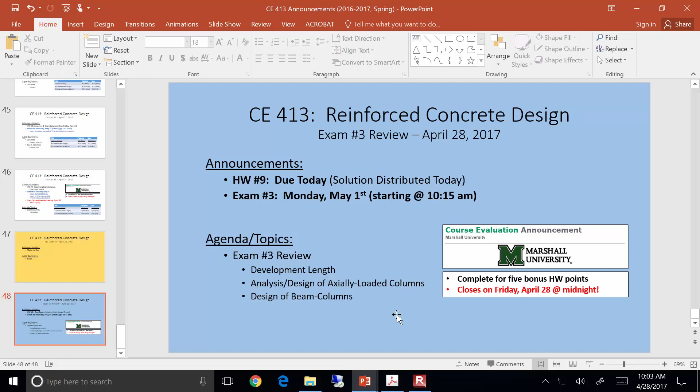I don't really think there's a whole lot to say about the solution. Problem 1 was literally just phi Pn, just calculated, and it ended up being about 570 some kips.

Problem 2, you had a design of a circular column. Go through and do the math. Now keep in mind this is a circle, not a square, so because of that, you could have 9 bars or what have you. It doesn't have to be even. You can, but it doesn't have to be, because they're just going to evenly space it around the spiral. So the solution that I derived was really the one that was in the book, which was using 9 number 10s. So there's that.

For problem 3, really the long and short of it is this: you should have gotten a KN of 0.579 and RN of 0.193. Go through and do the interpolation. You should get a rho of 0.027.

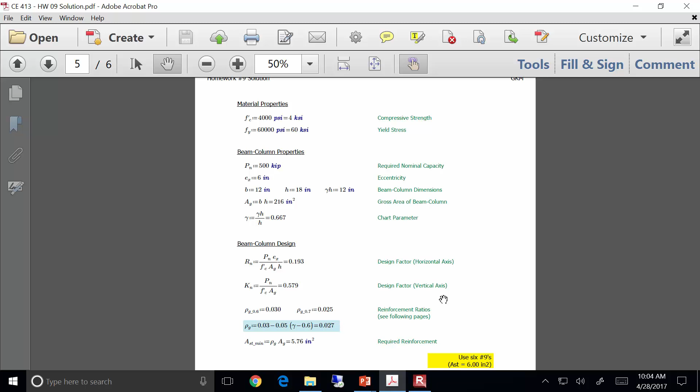And you should ultimately use 6 number 9s. Here's the alignment chart, or the interaction diagrams, and I drew the lines showing how I'm getting those particular values, so that way you can kind of see that. Sound good?

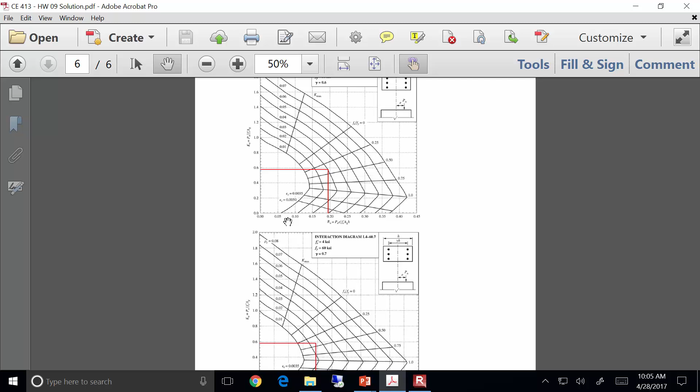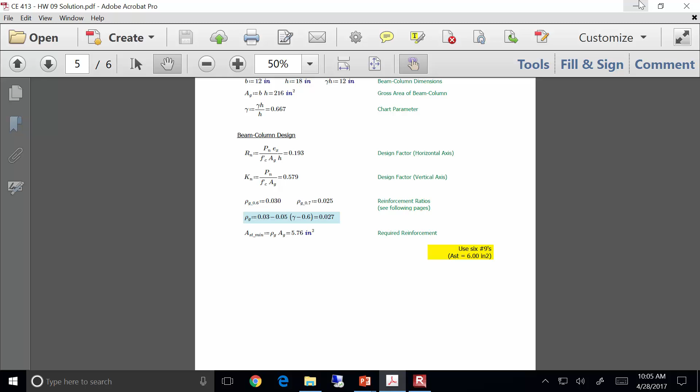When it was all said and done, the rho was 0.027. So ultimately, I ended up needing 6 number 9s. So it was a pretty straightforward assignment. Sound good? Yep. All right, let's talk about the exam.

The exam is going to be on columns, beam columns, and development length. That's going to be on this exam.

All right. Let's talk about the scheduling. So and the housekeeping, closed book and closed notes. You've got a oh, yep. That's not a mistake. I could have just said, you know what? No. No, I'm good.

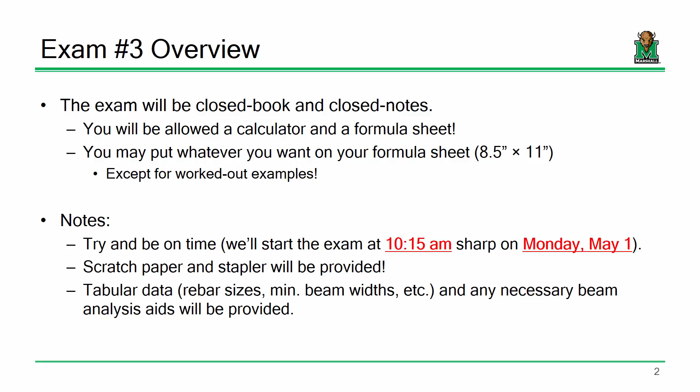It would probably not be the worst idea in the world to write down some fundamental beam analysis or any of those fundamental formulas, but anything esoteric you'll be provided. That's not a big deal.

Topics: development length. Make sure you can identify the parameters that may affect it—bar coating, bar size, bar location.

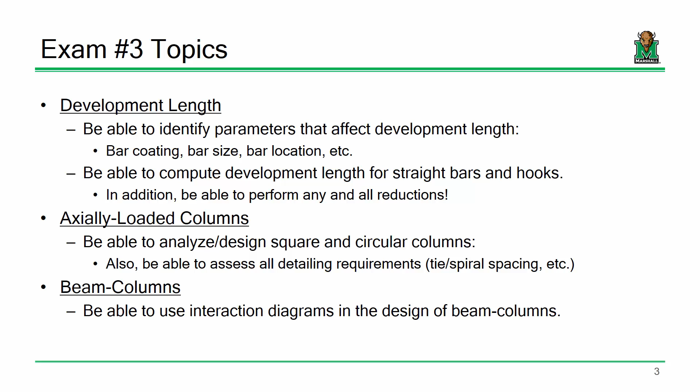Be able to compute development length for straight bars and for hooks, and be able to perform any reductions that go along with that. Columns: make sure you can analyze and design square and circular columns. Be able to assess all the detailing requirements as well, spacing, all that stuff. Beam columns: make sure that you can use your interaction diagrams.

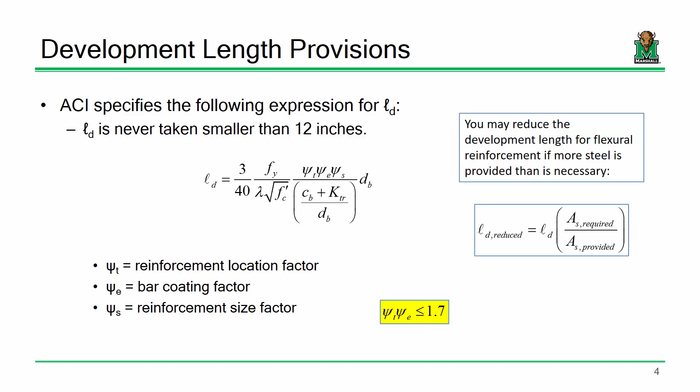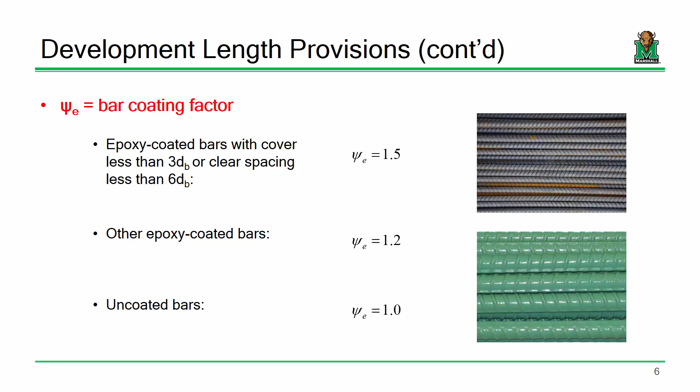For provisions for development length, I did my best to try and take the lecture notes and squeeze it into as few slides as possible, but there's just a lot of provisions, so there's really not much I can do about that. Here's your fundamental development length equation. Remember, you can reduce that. That product is always taken to be less than or equal to 1.7. Here's your reinforcement location factor, your reinforcement size factor, your bar coating factor, and the effects of spacing and cover.

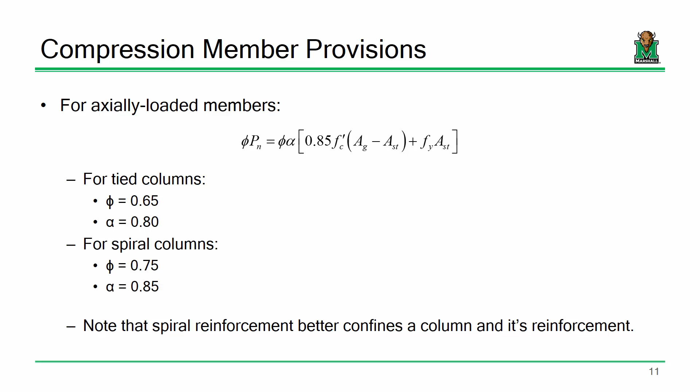Your transverse reinforcement index, your development length for hooks, and you can reduce that also. Cover factors and confinement factors, as well as the appropriate diagrams. Your phi-Pn for axially loaded elements, knowing your different phis and alphas.

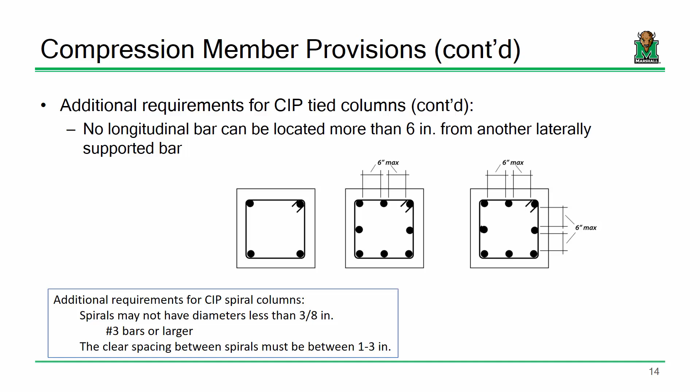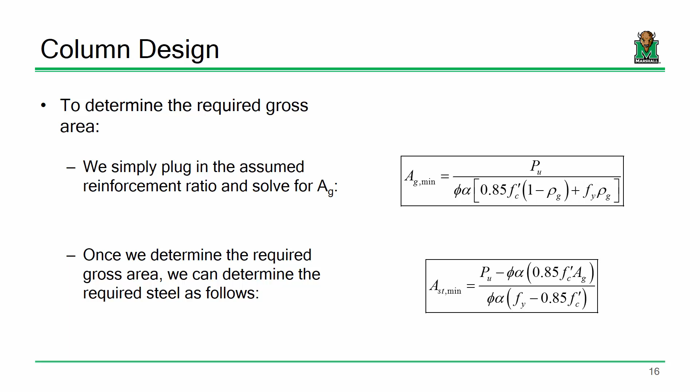Your reinforcement requirements for cast-in-place columns. Additional requirements for tied columns, including your bar spacing. Spiral steel requirements for circular columns. Design of columns—I know I'm going through this kind of fast, but you all have it in front of you. And beam column design. I know that seems like a lot, but it's really just a lot of provision stuff, stuff that you all could probably transfer onto a formula sheet with relative ease.

Yeah, 7 was serviceability, right? Bless you. That's right, yeah, 8 and 9. Bless you. 8 and 9.

So with that, it's your turn.

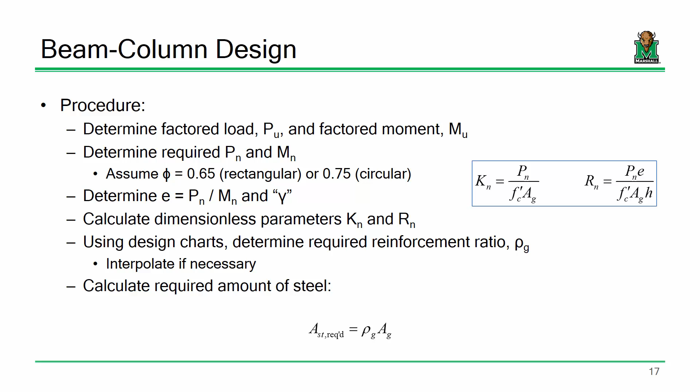Could you go to the slide where it talks about hook bars? So that's saying the side cover is less than or equal to 2.5 for number 11 and smaller hooks. If the side cover's more than 2.5 inches—greater, yeah—I see. Yeah, if you have an ample amount of cover, then you're allowed to make a reduction. We didn't have a homework problem on hooks, but it's similar, just a different equation. Other than the confinement factor and the cover factor, everything else that goes into the equation is the same, like the epoxy factor.

I'm trying to answer that as best I can. Is it possible that you need to determine whether or not you have enough room for development? Yeah, but you'd have to know it was a hook if you needed to compute these, because you need to know your dimensions. Does that make sense?

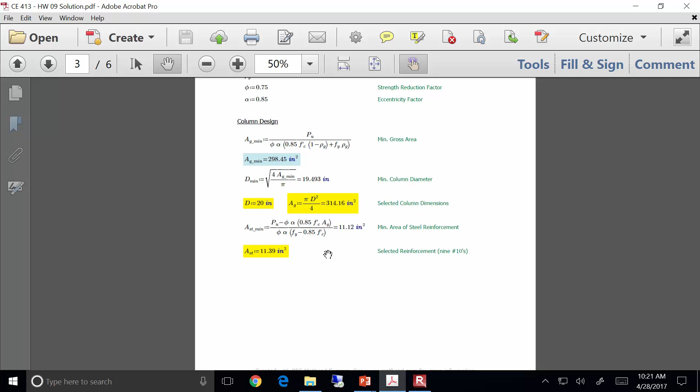Problem 3? Yeah, problem 2. When I did the math, I ended up getting 2.51 inches. I just went with 2.5.

So I had a column that was about 20 inches. With cover, the core diameter is 17 inches, so the area of the core ended up being about 226 square inches. If I use a number 3 spiral, I say, here's the diameter, here's the area, I can determine the minimum or required reinforcement ratio and plug that in to get the maximum spiral spacing. I got a little over 2.5 inches, so I just went with 2.5.

That's fine. I will say this, with spirals, it's a lot of reinforcement. When we did ties, we'd have tie spacing at like 16 inches, 12 inches, you know. Spirals have been like 2 inches. So if you can get something simple like 2.5, I'd use it.

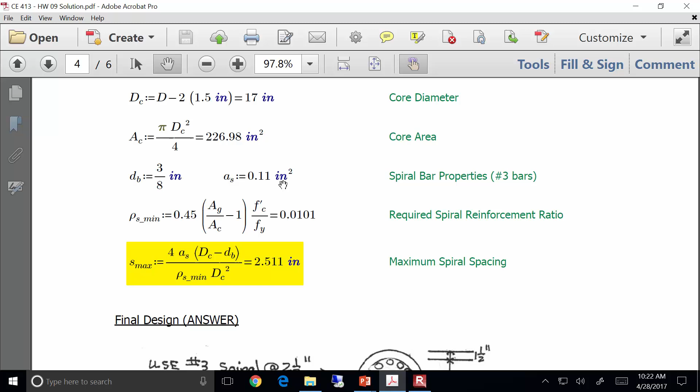I thought that was, what? Forms, it did? I was going to say that doesn't make sense because I was lazy, so I didn't want to draw this image. That image comes from the solutions manual, so I was about to say.

The column size, it would make sense if it came in 2 inches. So that's what the form size means, the outside diameter. Yeah, yeah.

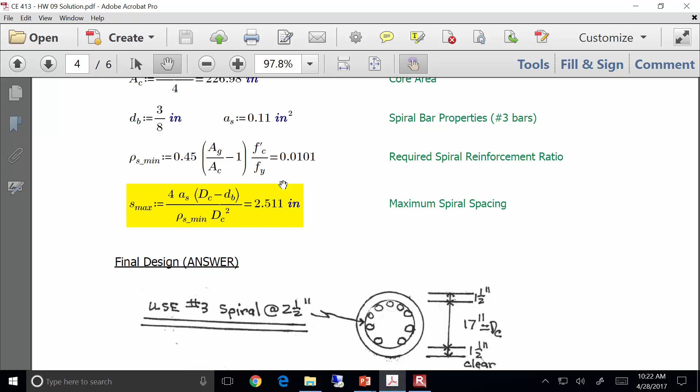It doesn't matter as long as you round to what I'd call an even increment. I rounded up in this case, but the idea is it doesn't matter because you're taking your actual gross area and plugging it in to get your steel. If you were to take this and multiply by 0.02, that would be wrong. Does that make sense?

Anything else? You do seem kind of cooked. I will say that. Just seem cooked. Yeah.

What am I doing at about 4 o'clock? Oh God, 4 to 6:30. Come on, did you have a question?

Yeah, so the spiral spacing. Spiral spacing can be in whole inches and then go to 2.5. I'd indicate that to the half inch. That's a lot of reinforcement, so if you can thin that up a little by using a half inch increment, do it. I got that number to 2.5, and that's what we're going to look for on the solution. I was watching your example following through and I just assumed. That's fine.

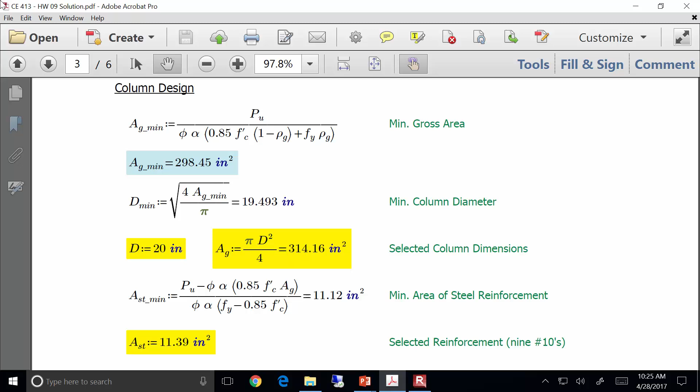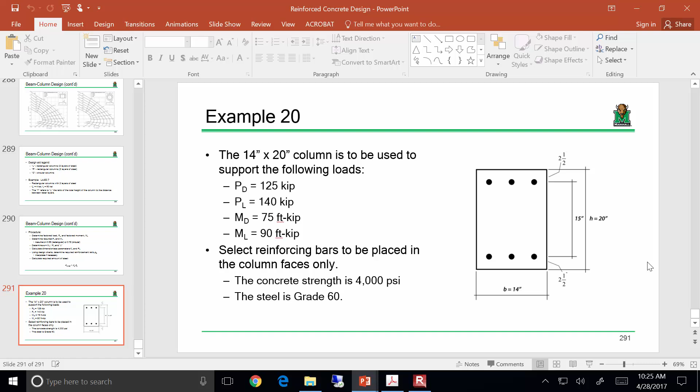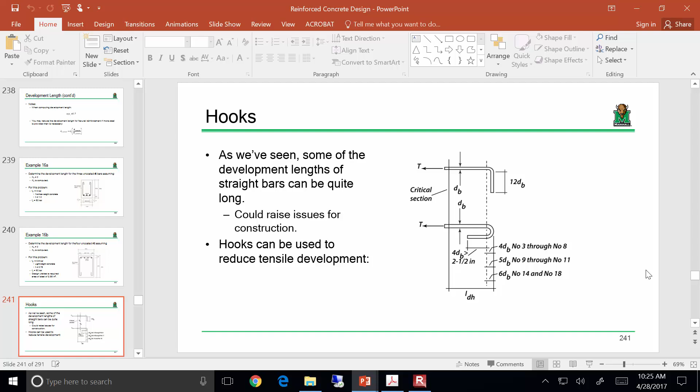I want to pull up both to show you. It's 12 bar diameters. And this one, what I was getting at, because it was easier to show you, that dimension and that depth depends on the bar size. That's just standardized, there's nothing really to invent there. I didn't put that image there because, again, you don't have to design that.

What's this? Your grading scale isn't setting it up to what? Doesn't go to 89.5. I round up, I've told y'all that. If you get an 89.7 at the end of this semester, you get an A. I told you, I round up.

What is the 0.45? That makes sense, it's like that time we rounded, like 12 up to 15. Yeah, I like that, like an 85 becomes a 90. Granted, that wasn't this class, that was steel. But yeah, it's the same professor.

That was for both. Wait, what? Yeah, what if our grade is a prime number? That it's a prime number? I don't know. When it was a prime number, what we're saying is in steel, like in the bolts, if it was a prime number we just round it up to like 15 or something. Those are bolt patterns, not grades. Now, I will admit, I did like what you all said in steel where you said it's not curving the grade, it's cambering the grade. That was a good one. When you put the load on it, it flattens out. But there is that, yeah, when I actually grade the test, it's sort of.

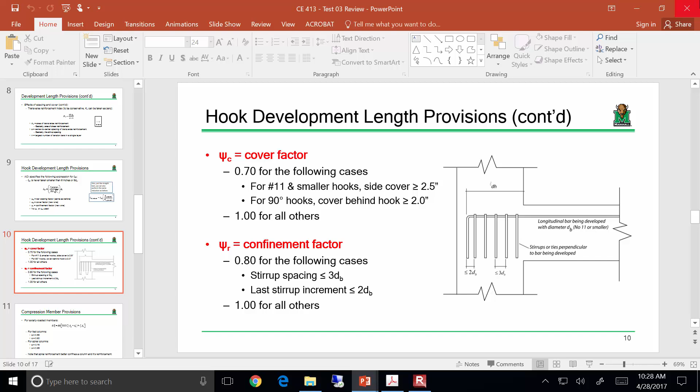Explain to me this confinement factor stuff right here. Okay, what is it saying? Hold on, let me. Okay, so the cover factor - when you're determining development length, you're trying to determine how far this hook needs to be embedded into the adjacent shape. Now what the cover factor is saying is that if you have ample cover, over 2.5 inches on number 11 or smaller hooks, and 90-degree hooks if you've got 2 inches behind here, that means you've got ample cover and ample concrete to develop that rebar, so you can reduce that length, in this case, by 0.7. Does that make sense? Now the confinement factor has to do with the stirrups. That concrete around the hook is being confined by those stirrups, like being held together. If you have a stirrup spacing that's less than or equal to 3 bar diameters, and this last increment is less than 2 bar diameters, then you can reduce it again by 0.8. And that's basically it.

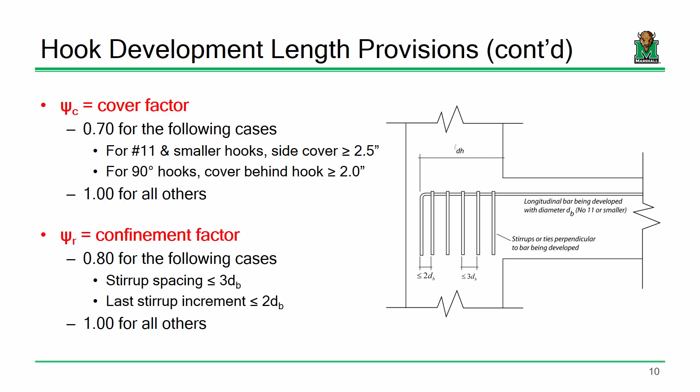What? You looked at me and you had a smile. Oh, okay, okay. So we multiply by 0.8. Why do they have both of those expressions, 0.7 and 0.8? Yes, because if you go back one, your development length equation for hooks has the psi C and the psi R. So that would be, you'd have 0.7 and 0.8 in here, so you would insert those. They'd just be other factors. So it's either 0.7 or 1, or 0.8 or 1.

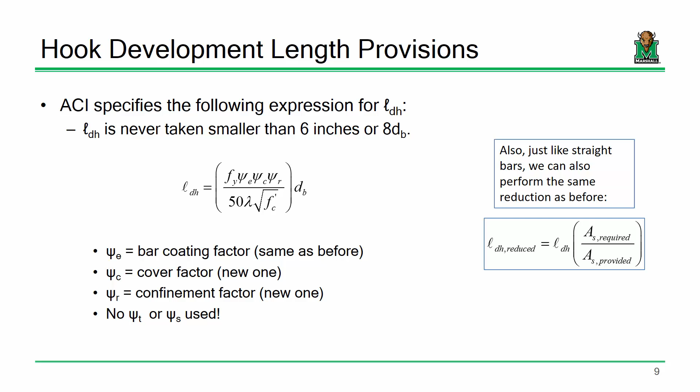That's not too bad, right? The cover factor, is it CB? Is that what that's representing? Or am I mixing stuff together? You're mixing stuff together. We're talking about that's on the denominator on the straight bar factor. Sorry about that. Yeah, it's kind of the same symbol as in steel design, it's a little c, it's not a big C.

It's understandable, but I do want to make sure that you all have exhausted every question. I mean, if you don't have any questions, then you don't have any questions.

I do applaud you for on review days not going over new material, because Dr. Wade thinks review days are just for, ask me 10 minutes of questions, now let's move on to this new topic. I'm leaving early, you're the one that calls it. Well, my behavior might be a little different if I had 75-minute classes. These are 50-minute classes, so I think it would be tough to cover new material and have an exam review in 50 minutes. I just don't think it would work well.

For not killing you? I haven't branched out into serial killing yet, so.